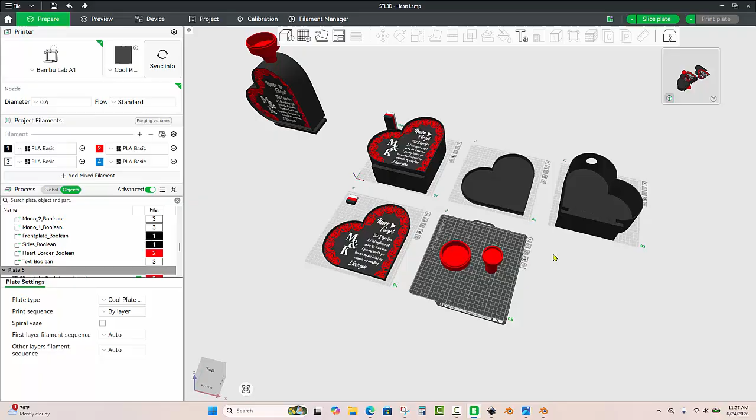In this video, we're going to be taking a look at how to go about resizing something to fit your particular build plate. In this instance, we're looking at a file and we're wanting to resize it to fit a build plate for a FlashForge printer, which has a build plate of 236 by 236.

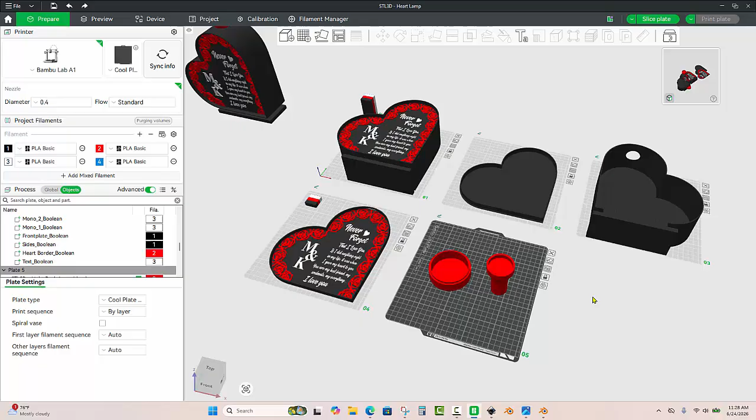Most of our files that we create, the maximum dimension we use is 240, because we're using a Bambu A1 and its build plate is 256. So if we have to scale it at all, we only have to scale it a very tiny bit.

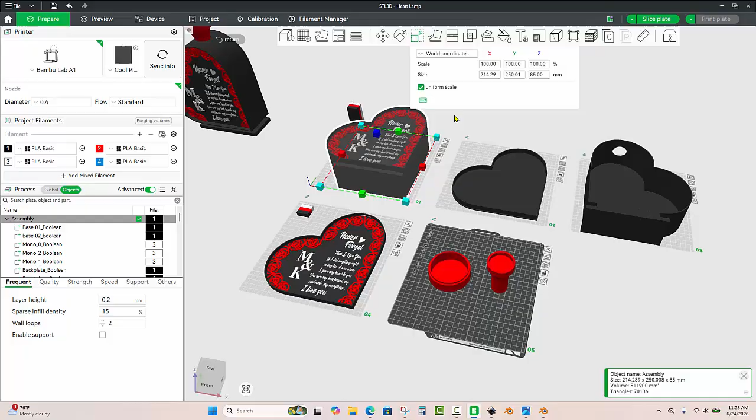Let's take a look at one of our bigger pieces here and see what we're going to have to do. Let's go ahead and go to our scale tool, and you can see here that we're at 250 on this particular one. So the max height here is 250, and we're going to have to change that.

Now I want to point something out while we're looking at this file. This file was created two different ways - we can light this file up. So if we want this front plate to light up, we would print this and this and this and our neck. Otherwise, we would just print our first build plate, so we don't print all these build plates for this particular lamp.

Getting back to the task at hand, if we take this and go to our scale tool, we'll go ahead and choose uniform scale. We need this value right here on the FlashForge - the build plate is 236, so maybe we only want to do 230, for example. Let's go ahead and do 230.

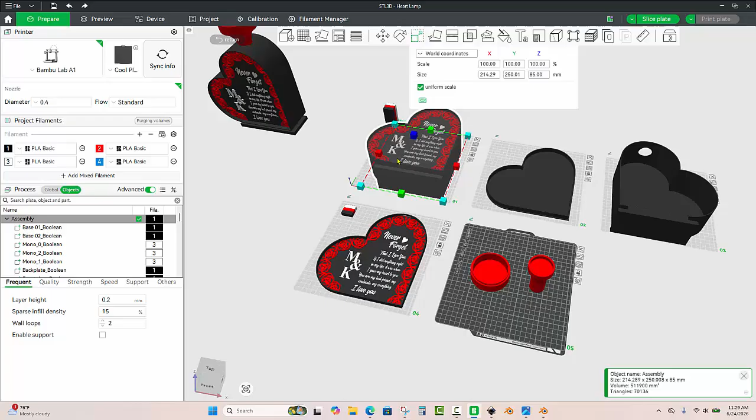You see the value here is 92%. So what I would do is back up, select everything, just like that, and then go to our scale tool and just type in 92%. We'll make sure uniform scale is selected. And now everything was scaled 92%.

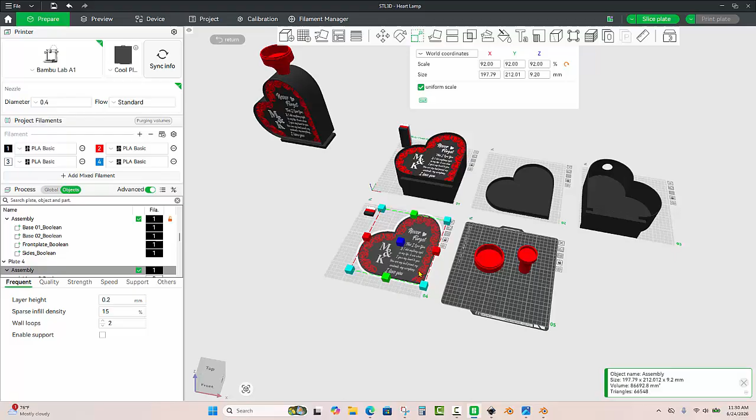So now if we select this piece and take a look, you can see we're at 230 there, we're at 230 there, we're certainly small enough there, and we're certainly small enough there. So now we can fit all of that on our build plate.

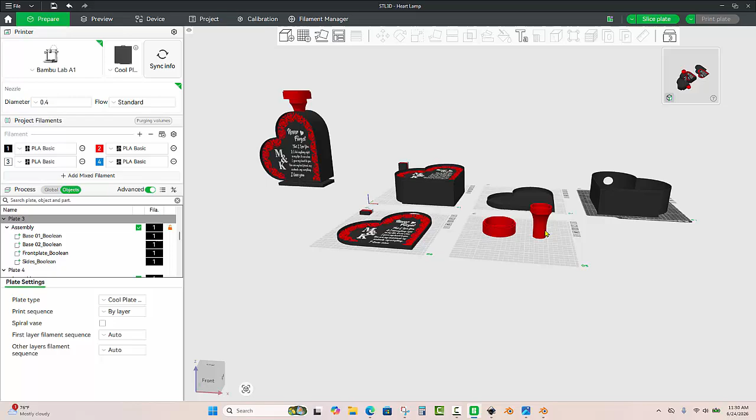Now this has a hole in it, right? When we scaled this 92%, by scaling everything together, this was also scaled 92%. So now this will still fit in that hole because we scaled everything together as one.

So that's really all there is to it - it's very, very simple. When we're making that small of a change, we're good, it's not going to cause a big issue.

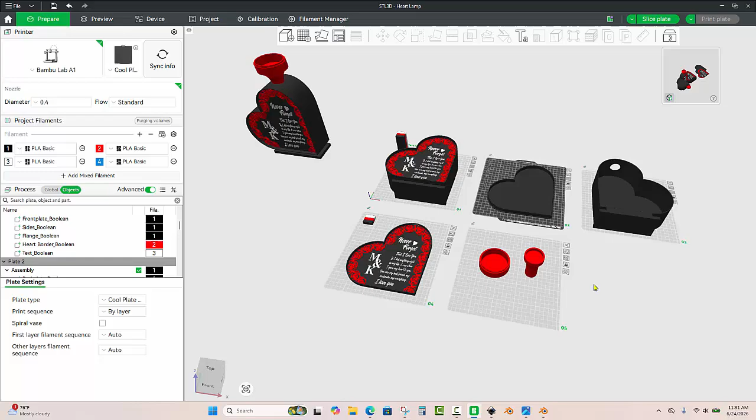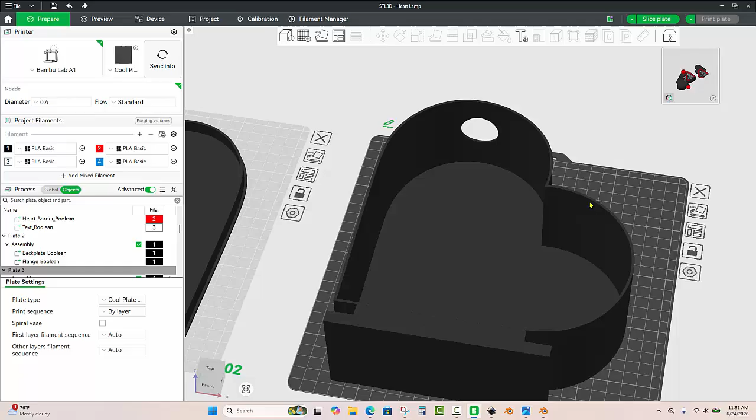Now if we were going to scale it considerably more, like for example the Bambu A1 Mini, which only has a build plate of 180 - now that is a significant change. What happens is when we're dealing with something like this, which is not very thick, if we scale it down, this becomes very, very thin. So no, we wouldn't be able to scale it down to 180 and maintain the thickness we need here.

But when we're going from 250 to 230, that's only a few millimeters - that's not going to be a significant change. So you shouldn't have any problem printing this, even though your build plate is just ever so slightly smaller.

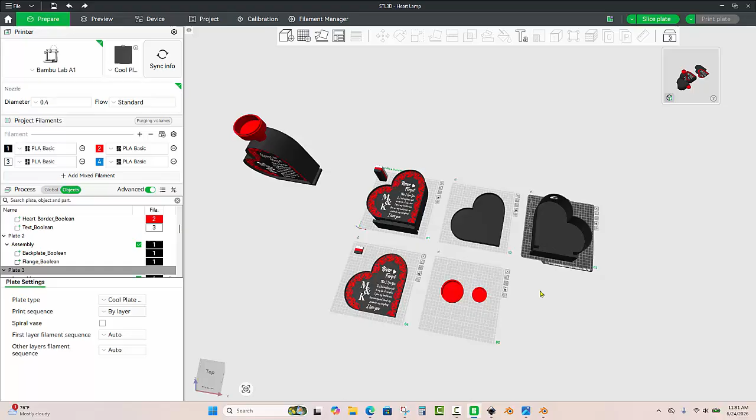So that's how you go about scaling designs that aren't going to quite fit your build plate on your FlashForge printers, because you're at 236. So yes, upgrading to the Bambu A2L will solve all your problems, because that baby is 330 - it's huge when it comes to build plate size.

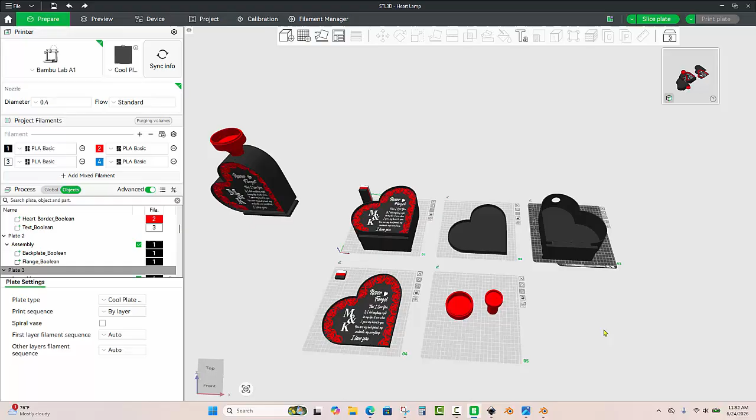All right, so that's it. That's how you make those changes. Really simple - hopefully that helps you out.

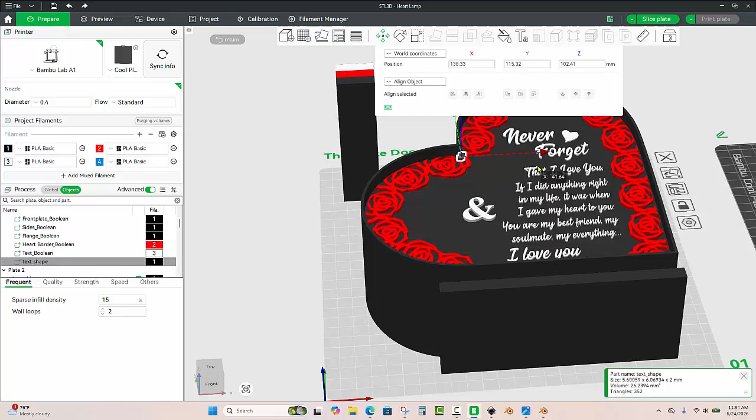Now, when we do that, there's our text shape way down there at the bottom, okay, because it's not part of our assembly. So let's see, I say that, but let me double check and see if it is part of our assembly. So let's go ahead and bring it up. I see what's happened here. So no worries.

So it's actually there when we alt-clicked this black piece. It's just very tiny and it's black, so let's go ahead and change it to white, and then we can go ahead and scale it up.

Something like that. Now that is a little extra there, but you can see we can go ahead and go back into our text tool here and we can scale it down. So for the size, it's fine. The thickness here, we'll make it 2.

And yeah, so I guess what we'll do is we'll just change our thickness right here. We'll go to the scale tool. We'll make it 2 millimeters thick, but we won't do the uniform scale.

And of course, we can change the font too. So we can go into our text tool here and we can change this font to whatever we want, for example. Okay, so no worries there.